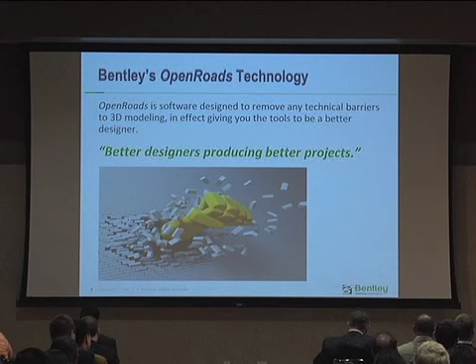And as I mentioned yesterday, OpenRoads is all about modeling. It's built to model. Over the years, we've realized our older software had some technical deficiencies when it came to modeling, and so we said, okay, let's start over. Let's build a new technology that removes all those technical deficiencies. You'll see what I'm talking about as I go through some of these demonstrations.

Let me give you some general things about OpenRoads, and then I'll get to a lot of videos and really cool stuff, and hopefully we'll get some oohs and ahs as we go through.

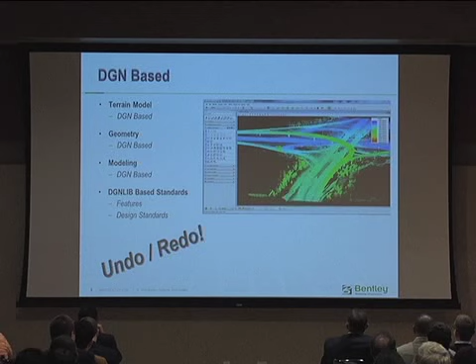The first thing about OpenRoads is everything is DGN based. Everything moves into the design file. There are no external GPK files, there are no external .tin files. The terrain model becomes a MicroStation element.

It moves in the DGN file. Your geometry lives in the DGN file. Your model are all DGN elements. Even your standards, your features, your AASHTO design standards, they all reside in DGN libraries. So everything becomes DGN based.

Now there's some really nice things about this. For example, because everything moves in the DGN, you get undo/redo. So you change a radius on a curve, wrong radius, just undo it. You make a change to a break line in a terrain, didn't mean to do that, undo it. So you get as many undos and redos as you do inside of MicroStation.

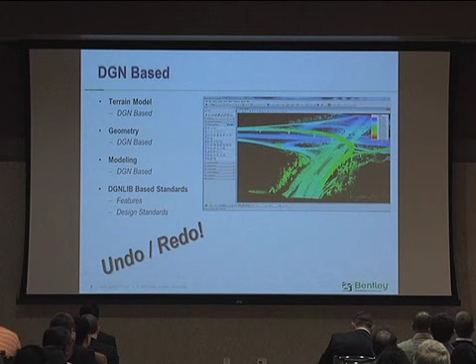Because you're inside of MicroStation, you've got an alignment or a civil element, you want to trim it, just use the MicroStation trim command or extend command. You can use any MicroStation commands on civil elements. It just makes everything much simpler.

The other thing you're going to notice about OpenRoads is the GUI, or the user experience. I always throw, when I talk about user experience, the iPhone up there. What made the iPhone so successful is the way it was intuitive. It would intuit what you wanted.

You think about, on the iPhone, you'd go and look up a restaurant, and they thought, okay, well if you look up a restaurant, you might want to call that restaurant, you might want directions to that restaurant. In other words, they intuit other things about what you did. OpenRoads is going to do the same thing.

For example, one of the things you're going to notice right here is we create what are called context menus. So if you select an alignment, we'll actually pop up a menu with commands specifically for alignments. Do you want to look at the properties? Do you want to open a profile? Do you want to create a corridor? Do you want to do a report?

And so if you select a terrain, we'll give you options for terrains. If you select a corridor, we'll give you options for a corridor. If you select an existing profile, we'll say you want to do a best fit. You select a profile, you won't get that option. We can tell existing profiles from proposed profiles.

The other thing is we do what's called heads-up prompts. Dialogues kind of move away. The dialogues are there, you can use them, but you don't have to. All your prompts are right there on your cursor, right there on the screen. And so everything's very graphical and very upfront.

The other thing we're going to do is what we call inline editing. You've got an alignment, you want to change the bearing, you want to change the distance of that tangent, you just click on that number, and right there on the screen you can change that and it'll update for you on the fly.

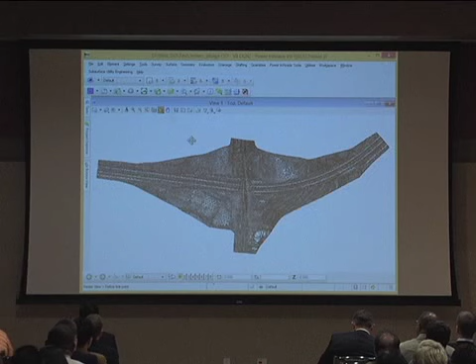Here's the dialog that says import the XML file. What it does is create a terrain. Now this is inside of MicroStation - notice that I've imported it into a 3D file. The terrain becomes a MicroStation element.

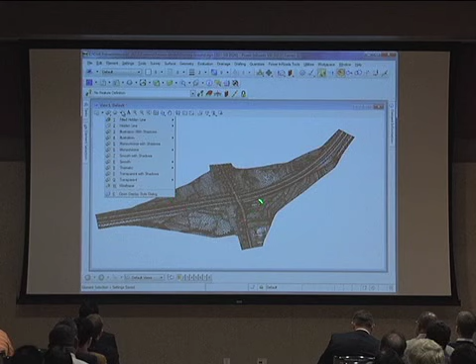Because it's a MicroStation element, if I want to change the view, I can just come right inside of MicroStation and change the view attributes, and it just changes the view of the terrain. For example, if I want to do a thematic view and look at elevation changes, I just change the MicroStation view and the terrain automatically updates. Because it's a MicroStation element, I can just change MicroStation views and look at different things.

I'm going to select it here and go to the element info. Again, because it's a MicroStation element, you can see it says it's a terrain model called ground. You can actually see all the information about the terrain - the number of islands, the voids, the features, the break lines - all inside the element info.

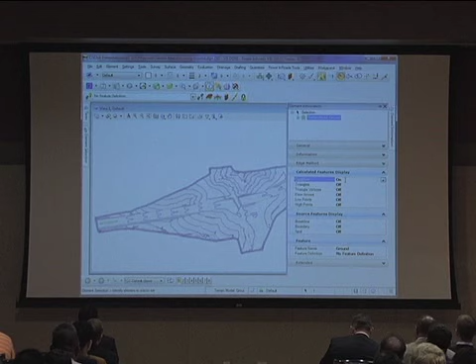Also inside the element info, you can actually turn the display on and off. For example, by double clicking, I can turn triangles off and contours on. I don't need civil tools for this - by the way, this is all accessible just in vanilla MicroStation.

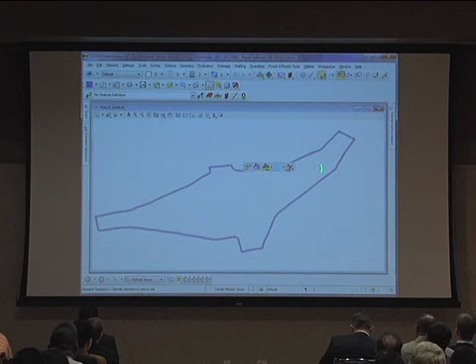Because it's a MicroStation element, here's our context menu. You'll notice one of the options, if you want access to those displays, you get what's called a quick properties dialog that you can just bring up attached to your cursor, and that makes it easy to use.

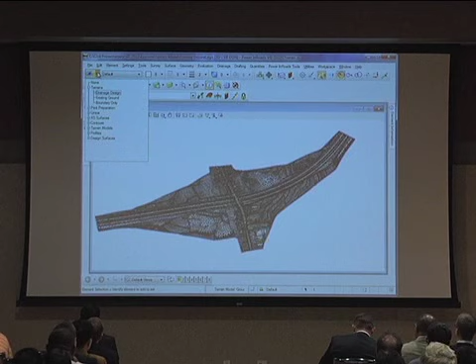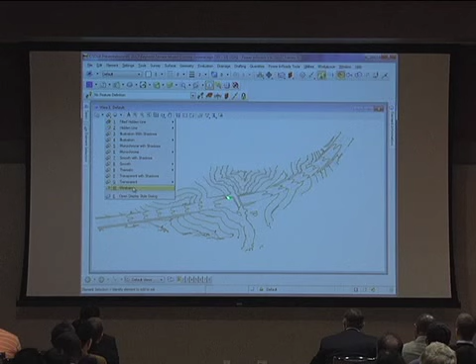Another aspect of it is because it's a MicroStation element, you can use what's called MicroStation element templates to pre-configure some setups. For example, I've got an element template called boundary that changes it to a boundary. I've got another one called contours that automatically turns it on with contours and labels my contours for me. So you can set these all up - here's one, you'll notice my contours are labeled.

By the way, because it's just MicroStation, if you want to change the scale, you just change the MicroStation drawing scale. You don't have to have other preferences for OpenRoads or GEOPAK or anything like that. For example, I'm going to go in here and change this to 1 inch equals 100. As soon as I do, all your contour labels just update on the fly. If I want to change it back to something else, I change it and they go back. So again, just change your drawing scale and everything will update because it's all inside of MicroStation.

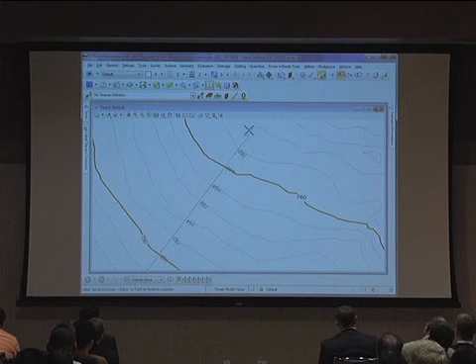We've got other options as well. For example, if you want to label your own contours, you can just go anywhere on there and strike a line, and as you move that line around the terrain, it'll just calculate the contours and label them for you as well.

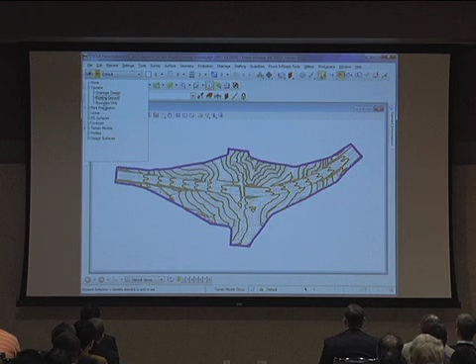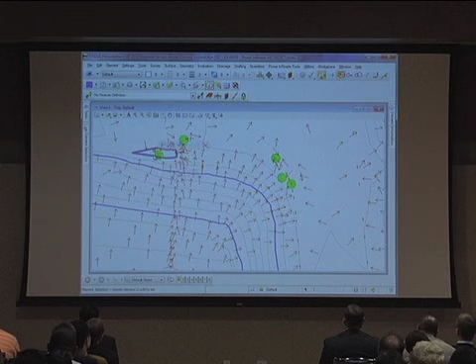We've also got several types of analysis tools. For example, here's one I've set up called Drainage Design, and so I just changed that element template. In this particular element template, I've told it I want to see all of my flow areas, my ponding, and all my high points and low points. So it just changes the display for me on the fly, and you can see all of that information on there as well - all kinds of analysis tools.

We can do volumes, we can do different types of drainage analysis. Here's one of the analysis tools you'll be familiar with if you've used the GEOPAK terrain tools. You can see as you just move around, you're getting the flow area, the triangle, the contour. You'll notice on the screen it's showing you the X value, the Y value, and your elevation as well. We've got other tools that'll calculate slopes.

For example, I've got one here. Notice when it says what terrain, I'm just identifying the graphical terrain so it knows which one I want to use as I move along that.

So this is a real terrain here, and it's right inside of MicroStation. I don't need any kind of external files. Notice these are all 3D. I'm going to rotate this around in 3D just so you can see that anytime we label something, it'll be draped on the terrain.

So even your flow areas are all draped so you can see the different flows and everything. Visually, it's really nice and it's really, really fast. Because it's in MicroStation, it's really quick and works really well.

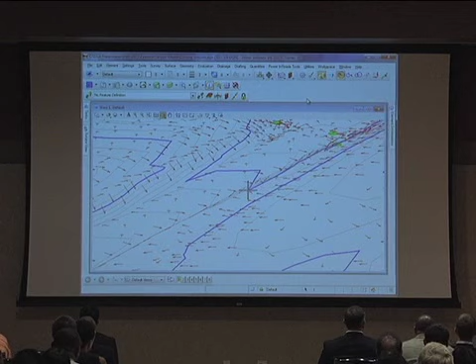So there's our terrain that we've brought in. Now I want to start developing some geometry. My terrain is in its own file called Terrain 3D. I'm going to go over and start storing some geometry, and I'm going to do that in a 2D file.

Okay, so here I am in a 2D file. You can see up top it says Geometry 2D. So how do I use that terrain? How do I cut profiles or cross sections?

Well, inside of... is this not running? I don't think it is. Let's back up one more time here, see if we can get this going. All right, we got a little problem here. We'll see what's going on. Are we not running here? Yeah, it should be. It ran yesterday. Can you see? My mouse is not moving either.

All right, let's do this. Start it right there for me. All right, let's start the slideshow. If it doesn't run, I'll kick it off on this. Okay, all right, hold on just a second, we'll get it going here. Yeah, it should be. Okay, so we'll figure it out. Is it playing? Well, that's not good, is it? Yeah, I don't need an ooh from that.

It's not connecting. Yeah, because we're not, I mean, it shouldn't matter, should it? Nope. There it goes. Okay. Can you download it, right click and play, or can you do a preview, or I just won't play it? If I get out, now right click and say preview. Yeah, see, it's your QuickTime. Yeah, that's unusual. All right, so I'm going to talk while they're trying to fix it.

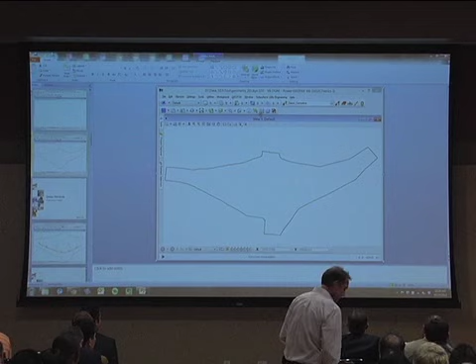All right, let me explain a couple things. Because everything moves in the DGN file, anytime you want to use something, you just reference it. Think about today, you've got a GPK, and you have to put all your geometry in the GPK. Well, in the new Open Roads, how you configure your geometry is up to you. If you want to put all your geometry in one DGN file, that's up to you.

Let's say you've got an interchange with an eastbound, a westbound, ramp A, ramp B. You could put each alignment in a different DGN file, and then you just reference in the alignments as you want to use them. Everybody with me? If you want to use a terrain, you just reference it. You want to get quantities from a model, you can reference it. For example, let's say you've got a 20-mile project, and you want to break that up amongst 5 different design teams.

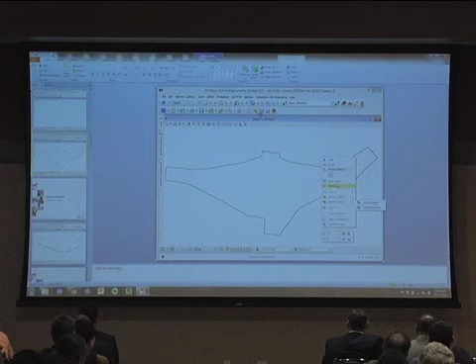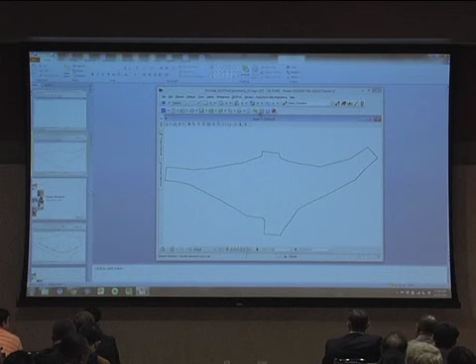So you want to give 4 miles to each design team. One design team could work in one file. A second design team could build their corridor in a second file, and so forth. So you could have your corridor split up into 5 different DGN files. When you get ready to run cross sections, you just reference all the corridors in and cut cross sections for the whole job. So how you federate your data, how you break it up, is completely up to you. It'll work exactly the same way if data's in a DGN file, in an active file, or in a reference file.

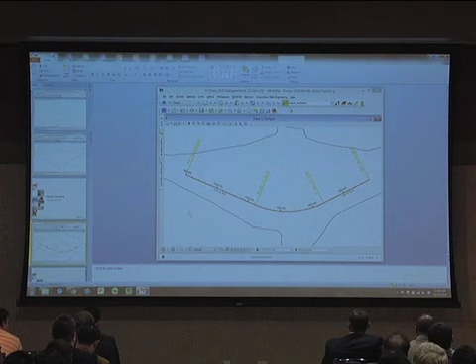We don't care. You want to get a report on an alignment, it doesn't matter if you're in the alignment file or you've got the alignment file referenced. We don't care, it'll work exactly the same way. So keep that in mind.

That's one of the big pluses of data moving inside the DGN file. One of the things I was going to show you on that video, if it would have run, is the fact that when I'm in a 2D geometry file and I want to bring in, let's say, a terrain to cut a profile off of an existing profile, I just reference the terrain. That's how I get access to it.

That's one of the new things you'll have to get used to, because you won't have all these external files like GPKs and TINs and things like that. Everything will be DGN.

Everything will be DGN based. It's not letting me do it. Not good? Nope. Okay. All right. Well, we're going to get through this 50-minute presentation real quickly then.

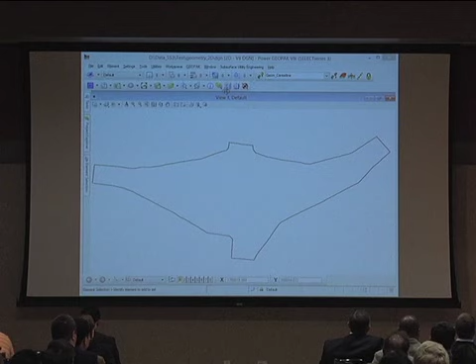Here's one about design standards. One of the new things you have in Open Roads is the ability to set up all your design standards. We deliver with Open Roads a Bentley Civil Imperial and a Bentley Civil Metric workspace, which includes all the AASHTO design standards. So as you begin to design an alignment, you can say, I want to design this alignment according to this design standard.

As you're designing, the software is watching, so if you've got a radius less than minimum, it'll flag it for you. The way it flags it is it puts a graphical marker, what we call an aeroglyph, on the alignment—a little triangle with an eye on it, saying you have a problem with this curve. If I hover over that error, it'll pop up and tell me what the error is. That aeroglyph stays there until you solve the problem. Change the radius and it'll update. So that's all the design standards.

By the way, you don't necessarily have to apply a design standard up front. If you've designed an alignment and didn't apply one, you can do it after the fact. You can say, oh, I forgot to do it, I need to pick an AASHTO 2-lane, 6% super, 50 miles an hour, and apply it to that road. You select the alignment, it applies the design standard. If you have any problems, it'll pop up an error message saying you have issues with these curves or these tangents. So you can do it as a pre-design or post-design methodology.

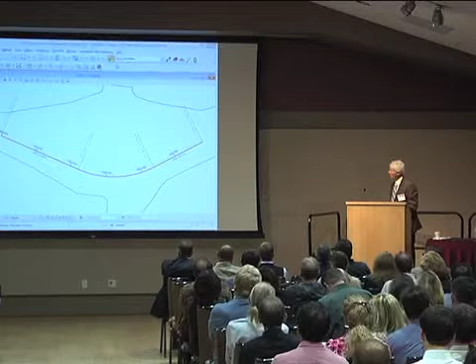By the way, I was hoping you guys could see this because you're going to really appreciate the stationing. When you place an alignment with Open Roads, it will station it automatically. The stationing is just automatic—you don't have to do a secondary thing. If you change this road in any way, for example extend this end, the stationing will update.

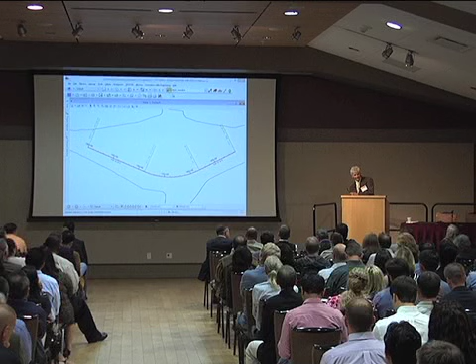If you want to change the stationing here from a beginning station of 140 to 130, you can select the alignment, a little box will pop up, and you can just key in a new station right there on the screen and it'll restation it for you. So the stationing is very dynamic—you don't have to go into the D&C Manager, station it, and then if somebody says we need to change the station, delete it and re-update it. None of that has to be done anymore.

You can try. Okay, yeah, it's good stuff, but we're gonna probably run out of time.

Vertical geometry. A couple things about vertical. I mentioned yesterday in the ROI of 3D modeling that you can work in 2D and 3D, if y'all were there you remember that. It's called design time visualization.

One of the things about this, I can select this alignment. A little context menu pops up and I can say open my profile for me. Profiles in OpenRoads actually have their own views. You don't have to actually go and say I want to plot a profile, you just say open a profile view.

I can select, for example, view 7, pop it up, hit a data point, and my existing profile will display. By the way, the existing profiles are dynamically linked to the alignment. So if you go to that alignment and actually pick it up and graphically move it, you'll watch the profile move in the profile view.

So if anybody changes the alignment, changes the curve radius, say from 1200 to 1500, the existing profile will update automatically. You don't have to tell it to update. By the way, if anybody updates the terrain on you, the existing profile will update automatically. You don't have to go recut it. It's a dynamic profile that's linked to the alignment and to the terrain as well.

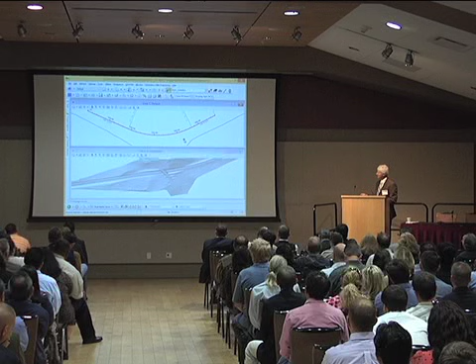Corridor modeling, I really wish these would run, they're just so cool. What we can do here is I've got a 2D view over on the left, I've got a 3D view over on the right. Basically what I can do is select the alignment.

I get a context menu pops up. It says I want to create a corridor. It says, okay, what do you want to call it? What template do you want to use? I can hit the Alt down arrow on my keyboard, the template library pops up. I choose my template. It says how often do you want to drop it along that alignment. I can say every 5 feet, every 10 feet, and then boom, it'll put it in 2D.

You'll get all your 2D planimetrics. You'll get your edge of pavements, your back of curbs, your bottom of ditches, whatever you want. And then, of course, over in 3D, you'll automatically see that as well.

Again, any changes to your profile, one of the things this video will show you, I'll open up a profile view, I'll change an elevation on the profile, boom, the model will update automatically. I'll come over here and change the starting station of my template drops, boom, the corridor will update automatically.

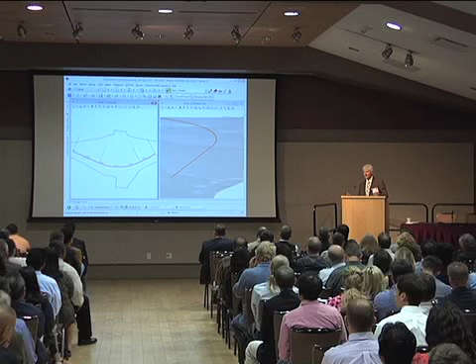So everything is dynamic. Everything is very automated and automatic as it goes through there. Now, one of the things, and so what those first videos would do, hopefully you'll get to see them at some point, is walk you through just some of the basics. This is how it works.

Now, what I want to do with the second part of the presentation is talk about what sets OpenRoads apart. Yes, the user interface is a lot easier to use. Yes, it's DGN based, which simplifies everybody's life. Don't have all those external files. But what really sets it apart? What makes it different? One of the things that sets it apart is what we call parametric design.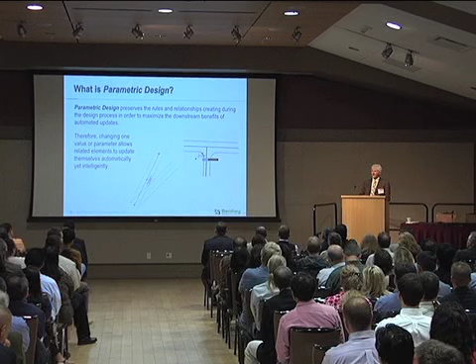What parametric design is this: as you're designing, OpenRoads is watching everything you do. You know, one of the examples I use is this one here. We've all done this in MicroStation. You go into MicroStation, you've got a line, let's say you've got an alignment, and you want to create edges of pavement, right? So what do you do?

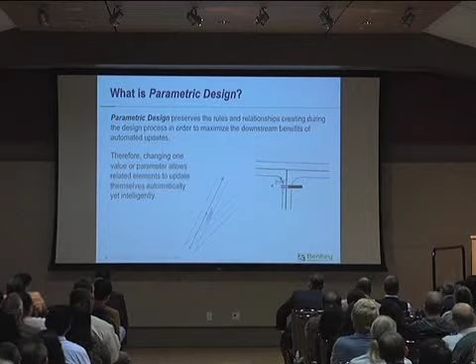You copy parallel. You say, I want to copy parallel 12 foot left, 12 foot right, 24 foot left, 24 foot right. And then somebody comes back and moves the alignment. And what do you have to do? Delete those lines and go copy parallel again, right?

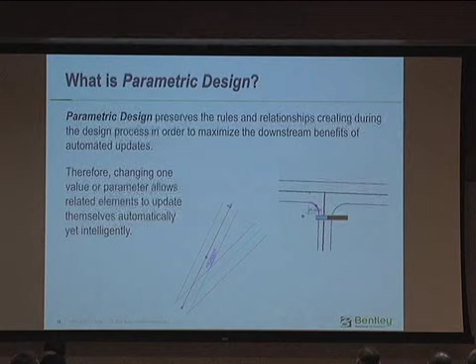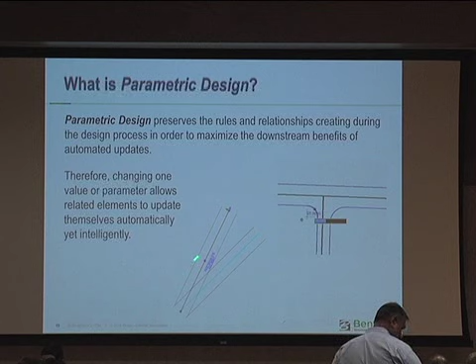With OpenRoads, you don't have to do that. With OpenRoads, if I say I want to offset parallel from that alignment, when you do that, OpenRoads remembers it, preserves a relationship between the edge of pavement and the alignment. It says, oh, you want those edge of pavements to be 24 foot from that alignment.

So if somebody comes back and changes the alignment, guess what happens? The edge of pavements will move with it. It's called parametric design. So it's this idea that we preserve these rules and relationships that you're building as you go through this design process. So if you change one thing, we'll update the whole thing. For example, I got a video here that shows this really nice.

If you come in here and let's say I've got edge of pavements for the side road and an edge of pavement for the main line, and you tell it you want to put in a curb return. So I say I want a curb return here of 25 feet. And it says, okay, how do you want to trim those? Do you want to trim those up nice and pretty? And you say yes. So it creates a curb return and trims. If you come in and change that curb return radius, say from 25 to 50, it'll update the radius, and it automatically does all the trimming. In other words, it remembers that relationship.

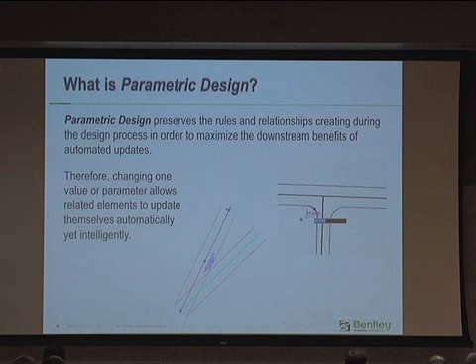So think about this. If these edge of pavements are in relationship to this center line, these edge of pavements are in relationship to this center line, the radiuses are in relationship to the two edge of pavements, what would happen if somebody came back and said, I need you to move the whole intersection? The whole thing will move for you. Everything just moves. And so it's all about parametric modeling.

This is, again, an example of that. What I do here is I actually just create some geometry. I create edge of pavements. I put in some return radiuses. I pick up that alignment, move it down a little bit, and when I do, the whole thing updates on the fly, because it's all in relationship to one another.

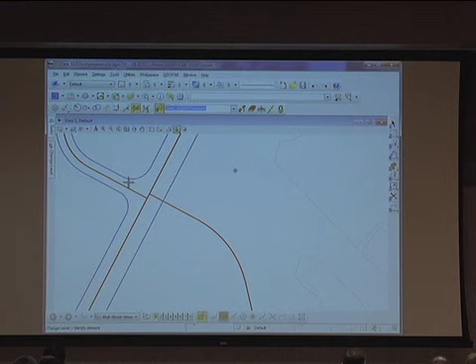That's one of the things that really sets OpenRoads apart. Here, and this all works. Here's one, hey, hallelujah, it's going to run. Here's one, a 2D view. Down here I've got a cross-section in 3D. And I'm going through this median with a turn lane here, right? Notice as I'm moving through, you can see the cross-section updating.

Now this whole median here is in relationship with itself. It's all parametric. So let's say you can see all the little values here on the screen. Let's say my project manager comes back and says, I need to lengthen, this is a 75-foot storage lane, I need you to change that to 100 feet. I click on that value, change it to 100 feet, and you'll watch the whole median just update on the fly.

I mean, that's cool, right? That's only one video. But that's what parametric design is. In other words, this whole thing is in relationship with each other. The radiuses are in relationship to the tangents, they're in relationship to the center line.

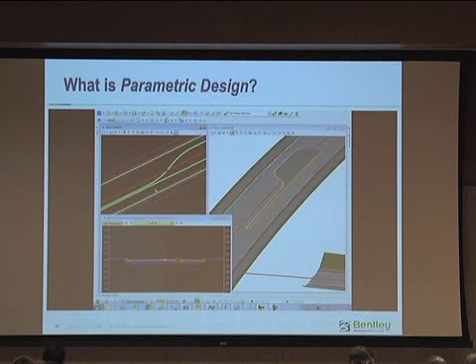If I come back over here, you can see here's an offset. So I say, well, I want to change that offset value for that. Make that change with inline editing right there on the screen, and you'll notice everything just updates. Because these are things in the past we'd have to delete elements and replace elements. You don't have to do that anymore. Open Roads is remembering how this thing was built, and everything's going to update, the 2D, the cross-section, and even the 3D. So this is what kind of sets Open Roads apart.

The fact is, when I talk to people about software, everybody wants automatic updates. Everybody says one of the biggest issues with my job is that I'll do all this work and somebody comes in and says you've got to make a change, and then I have to go back and redo it. I spend hours redoing that intersection, or I spend hours redoing that median. You don't have to do that anymore. Do it right, do it with Open Roads, and we'll update it.

So what happens is the software, in order to update correctly, has to remember your engineering decisions. It has to remember what we call design intent, and that's what Open Roads is designed to do, to remember what you're doing. I've got this thing here, because I always get this question: well, how does the software, how do I communicate? Is this like telepathy or something, or is there a real way that I can communicate to the software?

Now, sometimes you don't have to do anything. For example, if you offset parallel, the software says, oh, I'll remember that for you. I mean, that makes sense. So sometimes just the command you use is telling the software to remember what I just did. That works pretty easy. But there are other options as well. For example, many of you may be familiar with AccuDraw inside of MicroStation. In Open Roads, we have a new version called, we've civilized AccuDraw. And so we call it Civil AccuDraw.

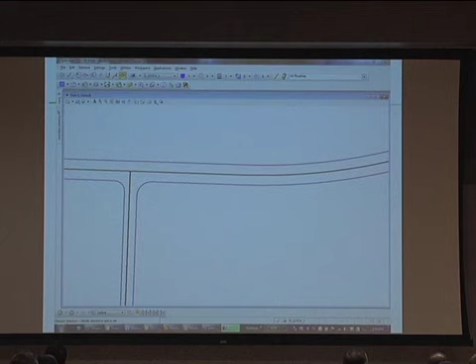You want to change that out for me, if you don't mind? So what we do is go in and locate that stop sign, and the way we locate it is using station and offsets.

Now everybody listen to me real quickly. Open Roads is a paradigm shift in the way we do design. For years, design has all been based on 2D plans. The way engineers communicate, whether you realize it or not, the language of engineers is stations, offsets, and elevations. You don't even realize you're doing it, but that's how we communicate: where's that at? Oh, it's at station 1400 and it's 35 feet to the right.

You don't need to do that anymore. In fact, that ends up being, I hate to use the word dumb, but I mean it in a good way - it's dumbed down, there's no intelligence there. For example, if I put in a stop sign at a certain station and offset, and then go move the intersection, the stop sign's just going to sit there and look at me, because I said you belong at a certain station and offset.

So I move the whole intersection, and the stop sign just sits there. What Civil AccuDraw allows me to do is say, I want the stop sign here, but I want you to be 12 feet back of the stop bar, and I want you to be 25 feet to the right of the edge of pavement. It creates a rule for the stop sign to stay in relationship to this stop bar and to the edge of pavement. Now when you pick the intersection up and move it, guess what? The stop sign will move, the stop bar will move, your curb cut ramps will move - everything will stay in relationship to that thing.

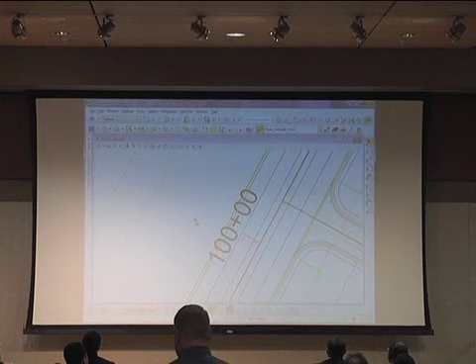This is a video here. It's not running, but it actually shows that process. Template drop. This is a cool video.

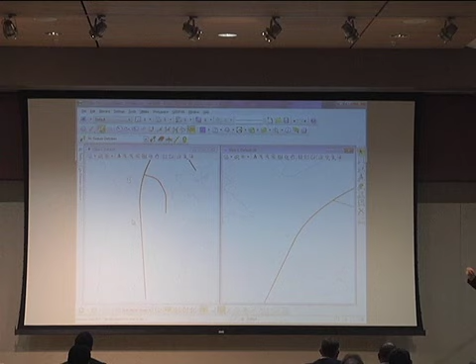I go in and place a corridor along this alignment. It asks where do you want to start, and I say start at the beginning of the alignment. It asks where do you want to end, and normally when it asks that we key in a station. But you can actually say, I want to snap to some object in the file. For example, let's say there's a wall up there, and I want to snap to the end of that wall. That tells the software you want this template to stop at the beginning of that wall. So if later on structural design comes back and changes the wall, your template will move automatically because you told it to be tied, or in a relationship, with that wall.

MicroStation commands are another one. You can use trim and extend. Here's a simple example: I've got an intersection with the front of the crosswalk snapped to the PC of the curb returns. I do an offset parallel, 8 foot back, to put in an 8-foot crosswalk. But when you change the radius and that thing moves, the back of the crosswalk extends too far past the edge of pavement on one side and too short on the other. It stays parallel, but it doesn't trim.

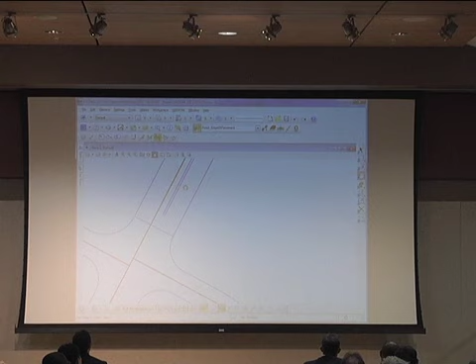You can use the MicroStation trim command. So I tell MicroStation, trim the back of the crosswalk to that edge of pavement and extend it to the other side. If you do that, Open Roads will remember that for you. So no matter what you change that radius to, MicroStation or Open Roads will always trim that line for you. It'll just remember it, it doesn't care. So MicroStation commands become very important.

There were a couple of videos here that I was hoping you would see. One thing we say is modeling is modeling. When you get in that file and get ready to model, we've got all the tools you need. If you've got a corridor, I was talking to somebody yesterday that did a preliminary design of an alignment that was 600 and something miles long. If you've got an alignment that's 600 miles long, by all means do a corridor: start at the beginning, drop a template every 10 feet, and model the whole thing. That's great for corridors. But what if you've got a short piece of road, like a driveway?

Corridors don't help for that. It's like trying to drive a nail with a screwdriver. Corridor tools don't work for that. What if you've got a park and ride? Corridor tools aren't good for that. What if you've got a pond? Corridor tools aren't good for that either. We're going to give you the tools you need to model, whether it's an intersection, a park and ride, or whatever it is that you need to do.

This is an example here, and again, it's not going to run. I wish it would.

Where I actually go through here on the east-west alignment, this is a corridor, and so I lay that in there using corridor tools to say drop me a typical, or drop me a template every 10 feet. Boom, it's done.

And then I come in and begin to model the intersection. So what I do is create the edge of pavements. Once I've got the 2D done, I create a profile of the alignment. Open Roads has learned a lot of lessons over the years. For example, this video will show you I'll use a corridor tool to place a corridor or a model over in 2D, and you'll get it in 3D. Everybody with me? Y'all seen that hopefully at least one time already.

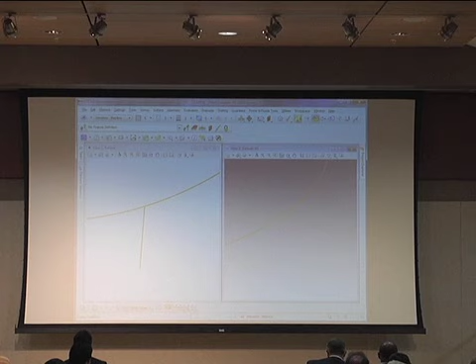So what we did in this video is I model it by hand. I go through and show you some of the really cool tools that you can use. And then we've got the big one.

We've got a new technology in Open Roads called Civil Cells, and some of you may have heard of this. Everybody knows what a cell is in MicroStation, right? The reason we have cells in MicroStation is because you have trees, manholes, or fire hydrants that you're going to use over and over again, so you store a cell. Well, we began to ask ourselves, what if we had an intersection that you wanted to use over and over again? Why can't I design the intersection and then store that off as a civil cell? And then on my next project, just say, boom, pop that intersection in there.

You can store civil cells. You can store all your roundabouts as civil cells. You can store intersections as civil cells. You can store medians as civil cells. You can store.

Just to see if I could do it, I designed an entire diamond interchange, stored it off as a civil cell, went to a new file, took two alignments, and said pop that interchange in there. It popped in and modeled the entire interchange with one step. So anything you want to model, you can save it off as a civil cell.

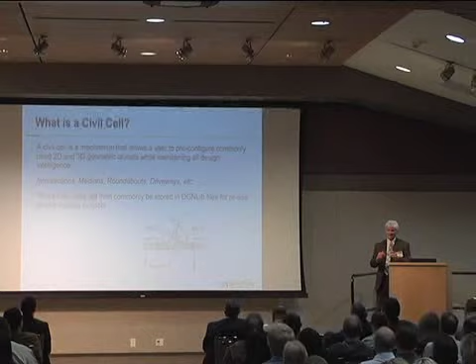Question: once you do that, if you want to modify it in this project, that's right. The beauty of it is that when you bring it to another area or another project, it retains all of its underlying intelligence.

So you only have to build one basic T intersection. Maybe when you build it, it's got 12-foot lanes and 25-foot radius returns. But on another project, you can drop it in, and then say this one actually has 24-foot lanes and 35-foot returns. You just change the radius returns, and the model updates. So what makes it a civil cell as opposed to a MicroStation cell is that it retains all that underlying intelligence.

Okay, the pretty little lady here is telling me I've got to cut it down. Oh, look at here, okay, this is going to work. All right, so here.

All right, I'm going to model that road here. I'm going to show you this. At least I get one, thank the Lord.

I'm going to create a corridor for that east-west alignment. It asks how often do you want to drop it, and I'll say every 10 feet. Notice I've got a 2D view, and over here I've got a 3D view.

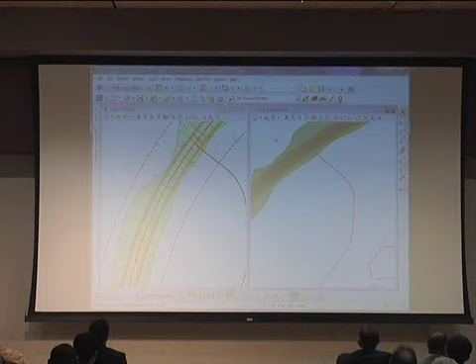Now I've got this side road here, a kind of long side road, and I said okay, I want to use a template for that. So I select my context menu, say I want to create a corridor, choose the template I want to use, I've already got one by default. And it asks where do you want to start that.

So I'm just going to leave a hole, because I'm going to need an intersection there. I'll just put a data point out there and model a corridor, leaving a hole. Now watch this - I've already got a T intersection designed in my library.

So in order to place this intersection, I'm going to come over to my task navigator menus, down to civil cells, and say place civil cell. We deliver all these with the Bentley Civil Workspace. I'm going to come in and choose from my DGN library - notice I've got some intersections, I've got a basic T. I'm going to say OK.

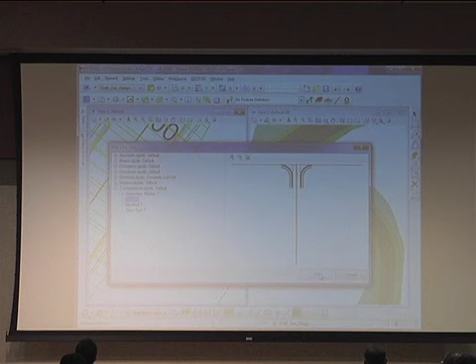It prompts me and says locate the side road alignment and locate the edge of pavement of the main line that you want me to tie into. It's going to put these little blue lines in there and asks, is this the way you want it configured? I'm going to say yes.

Now notice the slopes of the main line are going underneath the intersection - everybody see that? It says, do you want me to clip that out for you and make it real pretty? I'm going to say yes. I identify the corridor I want it to clip, and it drops the intersection, merging all the side slopes and everything in there for me on the fly.

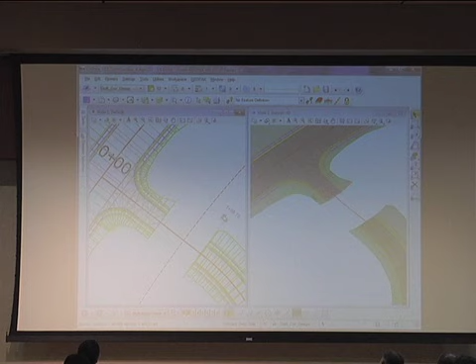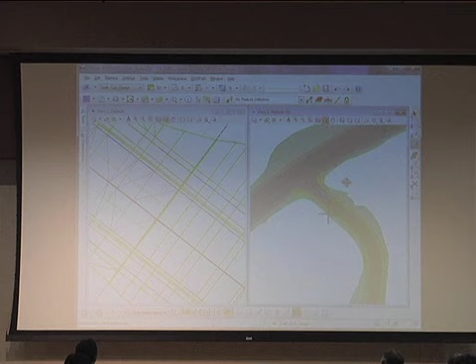Now notice I've got a hole here - how do I close that up? I just select that little element in 2D, pick it up, move it up there, snap to the back of the intersection, say OK, and your 3D model updates, it just moves it up there on the fly. So in about 5 minutes, I've designed my east-west alignment, designed the side road, and putting in a civil cell basic T intersection, I've designed that whole road.

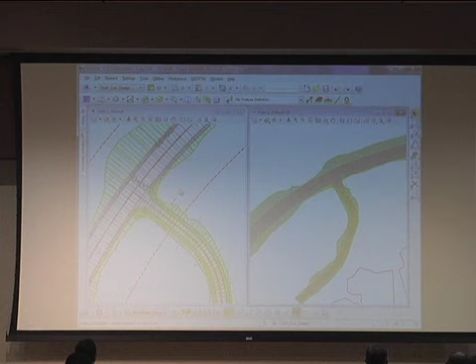Thank you, I at least got one out of there. I appreciate that. All right.

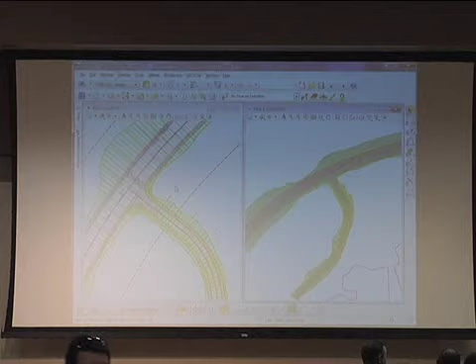Real quickly, we know the whole idea of this is to get it to construction. Built into OpenRoads is this concept called design stages. I can select that project and say turn off these 3D components and give me line strings, because that's what contractors want - give me 3D line strings. Then I can export that out to a DGN or DWG, send it out to a contractor, and they can bring that into AGTEK or whatever software they may be using.